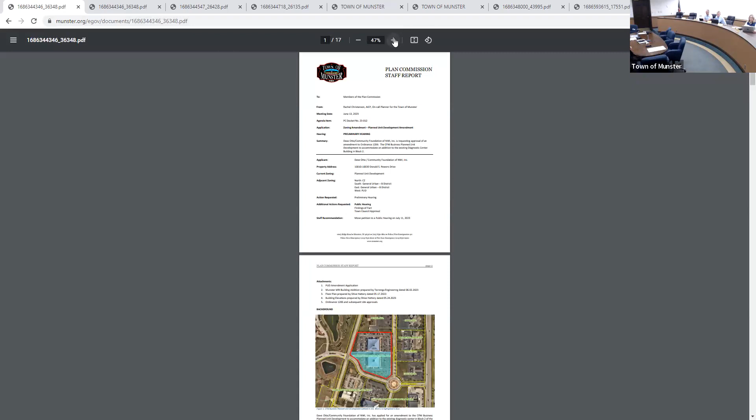Next up is preliminary hearings, PC 23-012. Mr. Otte from the Community Foundation of Northwest Indiana is requesting approval of an amendment to ordinance 1206, the CFNI Business Planned Unit Development, to accommodate an addition to the existing diagnostic center building in Block 2.

I am your on-call planner until you guys fill your planning director role, so I will be walking you through all of the staff reports tonight. Was everyone here at the last meeting that I was at? Because my first meeting was the May meeting, so this is my second rodeo with you guys for Plan Commission. It's great to be here.

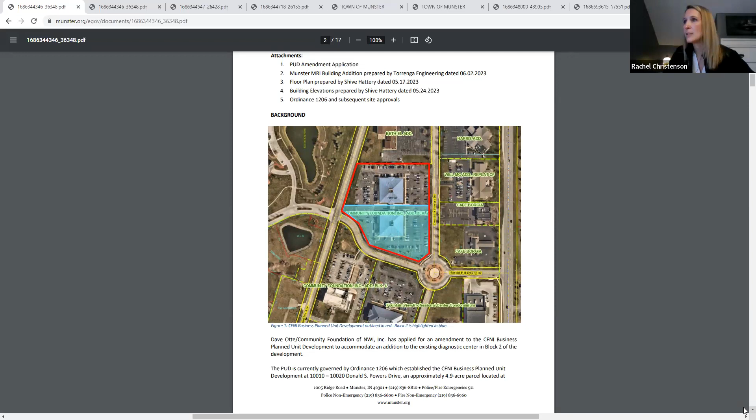But today what we're going to be looking at is the addition to the east side of that diagnostic center building. It's going to accommodate an expansion to the MRI suite and the CT scan suite for a total addition of approximately 2,000 square feet.

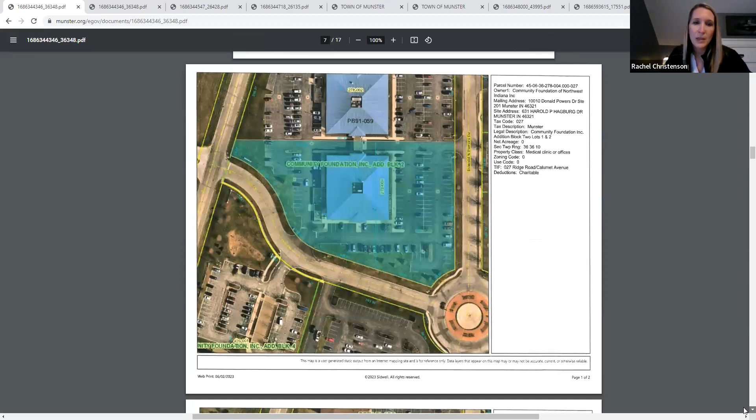Jill or Dustin, if you guys could scroll down to page 13 of the staff report, it will show a little cutout version of where the improvements are taking place. So this is a preliminary hearing for a 2,000 square foot addition.

Thank you. Is it between the two buildings? Is that how that's going to be set up? No, it's not. If we can get it centered a little bit, you can see on the building to the south—right there where the cursor is being hovered over—that 2,000 square foot addition will remove 11 parking spaces from the site.

There's going to be an addition of a chiller area that will be fenced in, and then, of course, that CT scan suite and the MRI suite will be included on the interior of that addition. This one, since it is an old PUD, it was kind of hard to go back and see exactly what was all approved with the original PUD.

The changes being asked are not very substantial. Some parking will be removed, but they're putting a sidewalk around the addition, and there's fencing proposed around the chiller. As we move forward, we'll ask the petitioner for more details on that fencing. There's also a discrepancy on the submitted plan—one area shows a 9-foot sidewalk, another shows a 6-foot or 5-foot sidewalk, so that will need to be clarified before public hearing.

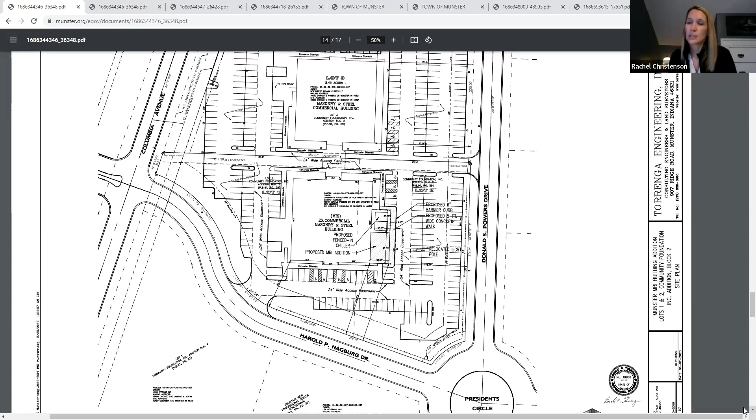Okay, great, thanks. Anything to add, Mr. Anderson? No, sir. Mr. Otte, you want to add something? No, sir. No, sir. It is what it is, right?

It's just a small 2,000 square foot addition on the southeast side of that building. It'll be structural steel, masonry, concrete floors.

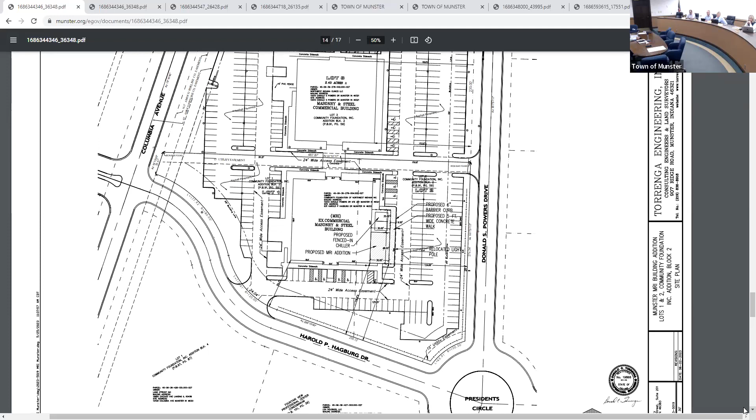Brian did a parking study, and it looks like we're averaging 71 spaces available at 10 o'clock, 2 o'clock, and 4 o'clock. So it looks like we have sufficient parking, and we've entered into an agreement with Fountain View before, in the past, if we have overflow, to capture 20 spaces from them.

I think we have exterior—pardon me, go ahead, finish. So if we do have struggles with parking lots, we can always re-enter into that agreement with them, because their parking lot's basically empty.

The exterior materials are going to match the current structure—light peak brick and basically a flat EPDM roof, and the glazing will be that tinted blue. Will it require any additional rooftop units? It'll be inside with the mechanical room, because if it ends up outside, obviously that raises screening concerns.

Thank you. Any other questions? Mr. Chairman, I'll make a motion to set this for public hearing. There's a motion, is there a second? I'll second the motion. Any discussion? Roll call: Mr. Anderson, yes. Mr. Zalinski, yes. Mr. Speck, yes. Dr. Kulturitis, yes. Mr. Rappin, yes. Ms. Mellon, yes. Mr. Baker, yes. See you next month.

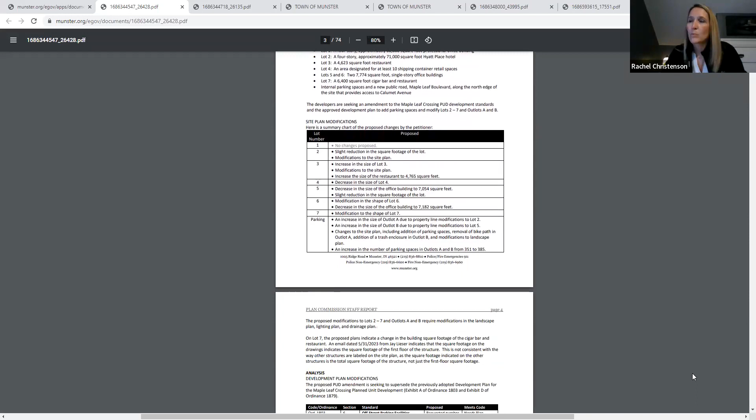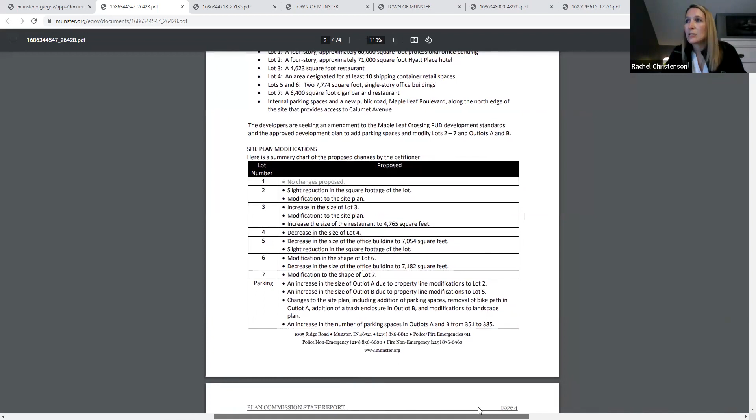Lot number 1 has no changes proposed. Lot 2 requests a slight reduction in square footage and modifications to the site plan. Lot 3 would see an increase in size, modifications to the site plan, and an increase in the restaurant size to 4,765 square feet. Lot 4 has a decrease in size, and lot 5's office building decreases in size along with a reduction in the lot's square footage. Lot 6 has a modification in shape and a decrease in the office building size, and lot 7 has a modification to its shape.

All of those modifications to the lot sizes mean an increase in the size of outlots A and B, both of the parking areas. In addition, there are changes to the overall site plan, including the addition of parking spaces and the removal of the bike path that cuts through the center of the site. There's also an addition of a trash enclosure on outlot B and modifications to the landscaping plan. Overall, the number of parking spaces being requested would increase from 351 to 385.

Picture. If we can pull up, let's keep going. So there's 2 pieces of this that we'll need to consider. Don't know where to go, so... what page is it on, Rachel?

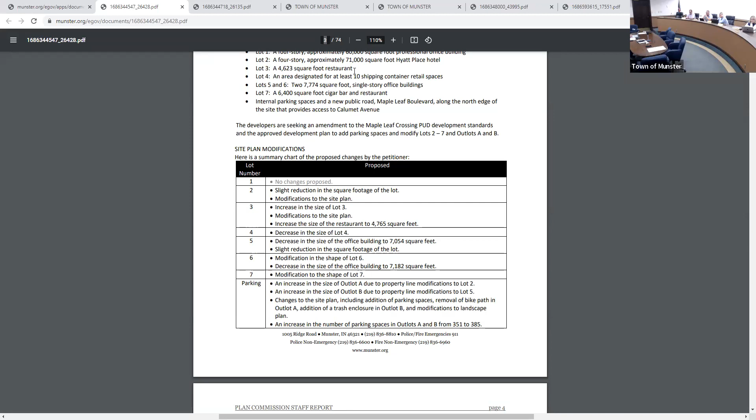Let's go to page 13, because this will give you guys an overall view of what the proposed changes are.

So the areas highlighted in red on this drawing are the changes being proposed. You can see a lot of the proposed changes are in the northwest quadrant of the site, or the northwest corner of the site.

That's up against the NIPSCO easement, correct? It is up against, well, I think the NIPSCO easement is around there. And then there are the railroad tracks. Yes, there may be two NIPSCO easements. This is the Pennsy Greenway.

So there are two parts to this that we'll need to consider. There's the modifications to the overall site development plan that we'll have to take a look at and approve, and decide what changes you guys think are appropriate to be made. And then we'll have to look at the actual standards, the text part of the ordinance, because there are a couple of discrepancies right now that I would hope we can get cleared up as a plan commission.

We're going to go through my analysis on the site plan modification, so that's where we'll start. You can stay on this page. First, we're going to talk about parking.

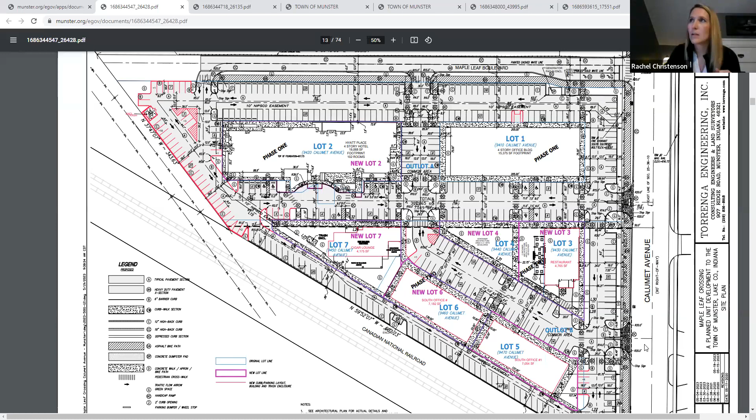The landscaping plan—Jill, if we can slide down a little bit more, the landscaping plan is included. Let's keep going. These are all the drainage calculations; it's likely going to be closer to the end of the document.

There is some landscaping that's being proposed to change as part of this plan, mostly focused on that northwest corner of the site. This is the lighting plan, and this is the proposed landscaping plan. Originally there was quite a bit more landscaping in that northwest corner, but with the removal of the bike trail, the landscaping seemed to have gone away with it.

We asked the petitioner to add some landscaping back in, but that was not changed or revised before this meeting tonight.

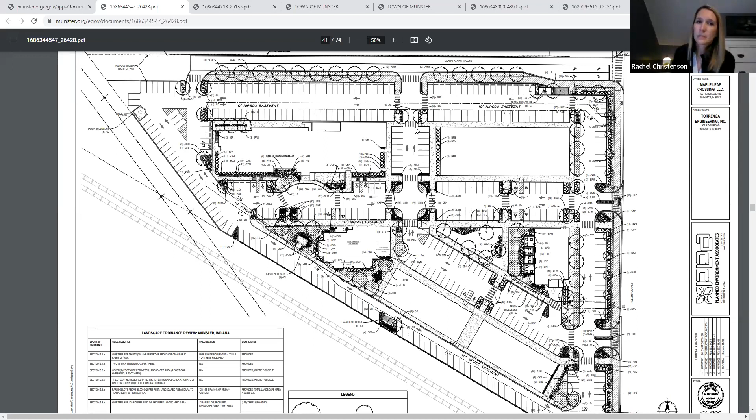Sorry to make you flip back, Jill, but if you could go to page 6 of the staff report and zoom into that, you can see what the currently approved landscape plan looks like.

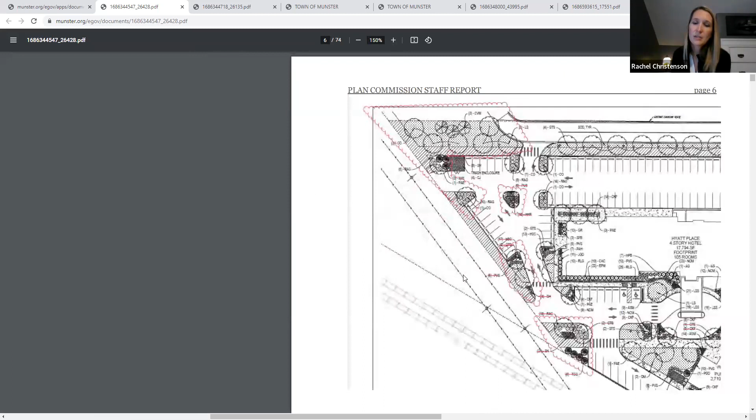You can see in red it's been highlighted to show the areas that have been removed with this petition that has been submitted. If you scroll down to page 7 of this document, you can almost see a side-by-side comparison of the amount of landscaping being removed with the proposed parking changes.

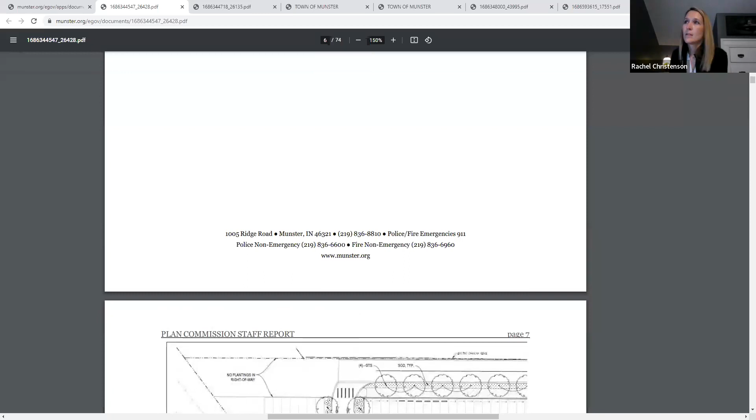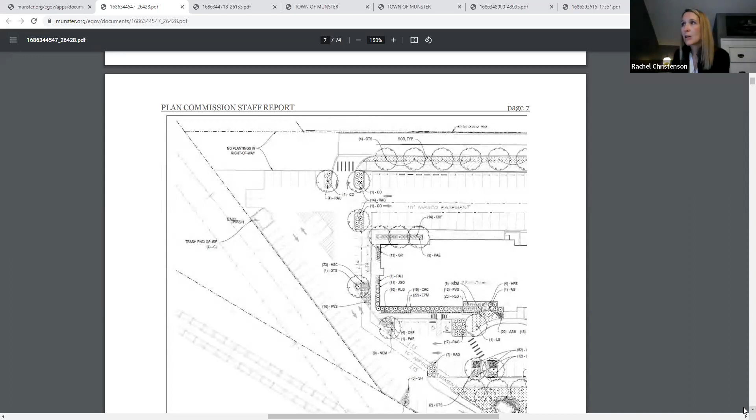For my staff recommendation on the PUD development plan and site plan, I'm aware that the petitioner's goal is to make better use of the site by removing the bicycle path and repurposing that area for additional parking spaces. In my opinion, there is still bicycle connectivity to the site with the proposed bike path on Maple Leaf Boulevard, or Maple Leaf Crossing, and the proposed bike path along Calumet Avenue. So with that being removed, it makes sense that we would be modifying the site to accommodate the removal of that bike path. However, I am concerned with the increase in hardscape and the decrease in landscape areas of the petitioner's proposed plan.

Should I be going through a staff recommendation right now, or do you guys want to hear from the petitioner first? The petitioner, because I want to hear about more spaces, but not just yet.

So thank you. Any questions for Miss Rachel as it relates to her presentation of the recommendations from staff?

Either or none. Is there, inasmuch as this is a public hearing, somebody to speak on behalf of the petitioner on this particular subject? If there is, please come to the microphone, state your name and address for the record, and you can maybe just stay on that page you were on.

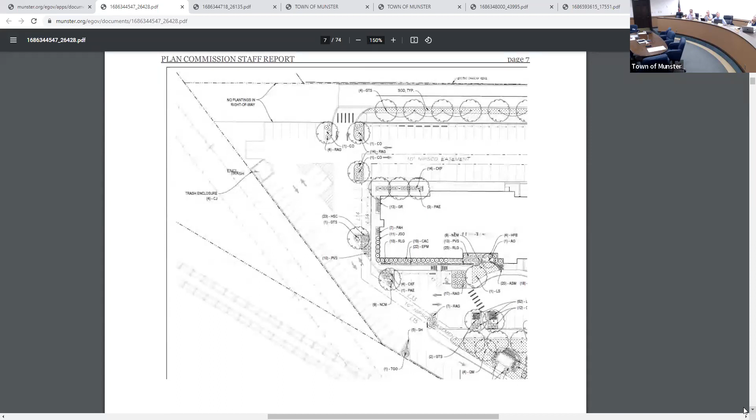David Beach, 1630 Cherry Blossom Drive. When we were here last month, we had proposed, well, let me back up.

We recall when we first started on this project, Jay bought the parcel of land, and there was approximately an acre at the back that was still owned by the town of Munster. The town traded that in exchange for Jay designing and building and dedicating the land for the road. So Maple Leaf Boulevard, along with the bike path, comes along the north boundary of the property, and near the back or western edge, but not all the way back, they turn and connect with the right of way, which will go through to Fisher Street.

And when that trade was done, there was still a little piece in the very far northwest corner, west of the right of way, where the bike path and the road connecting to Fisher would go. So what we had proposed was that little northwest corner could have accommodated some additional parking. You recall when we were here last month, it was pointed out that the land swap for Maple Leaf Boulevard for this back acre—the metes and bounds took that right of way all the way through to the west corner of the property. And Lansing Country Club had, I guess, presented something where they might connect through this wetlands, which I think is currently owned by Pepsi.

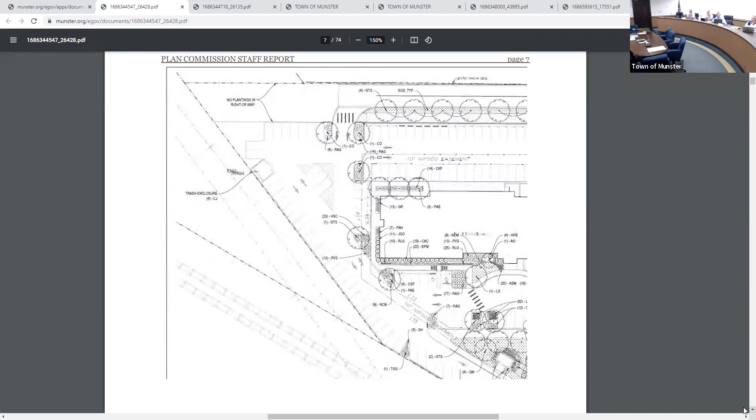So what we did is we just removed everything from that northwest corner. The town owns it, we don't own it. I don't know if there are some other uses someone else might want to make of it, but we took everything out of there. It's not ours to develop at this point, and we're fine with that. The town still owns it. This back corner where it says no plantings in right-of-way—my understanding is that little corner is now owned by the town, not by us. So that wasn't part of the swap for the land for Maple Leaf Boulevard. It was. How does the town still own it? This piece of land that runs the entire length of the property was traded from Maple Leaf Crossing back to the town, and we had thought it ended where the road ended. We were just trading for the road, but the legal description runs the entire length of the property. So it's not ours to develop. We simply removed it.

As we said last month, we need to get our curbs and gutters going, so we took it out. Obviously that decreases the landscaping, but for edification, right to the north you have the Pepsi manufacturing, which is kind of a corrugated steel building. And to the west, you have the two large NIPSCO transmission lines that connect with a substation just northwest of this. That's where that little corner is located, the very far back of the property.

Did you give that land back to us? We did. When did you do that? When we traded the Maple Leaf Boulevard for this back acre several years ago.

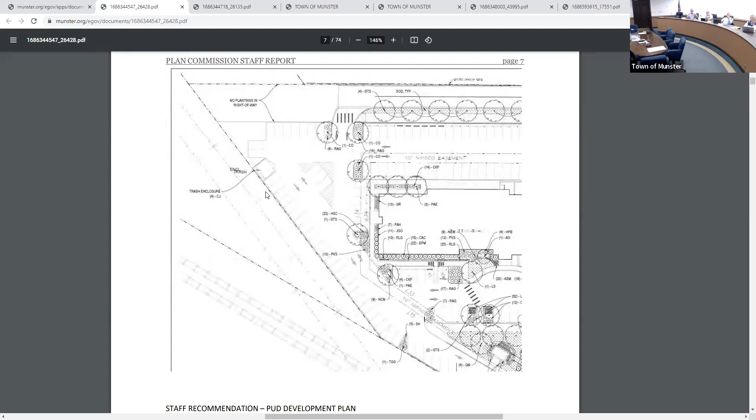Councilwoman: well, so it says - okay, so I get this, what is ours and what is not straight. One of the motion with conditions that staff is recommending says a commitment to plant future parkway trees per master zoning ordinance after construction of Maple Leaf in the right of way, labeled 'no plantings in right of way.' So is that - can you circle that with your finger right there?

No plantings, touch - well, don't, or just - it says 'no plantings in right of way' right there. So is that ours or not? It is, it's public right of way. So we want them to put trees in there.

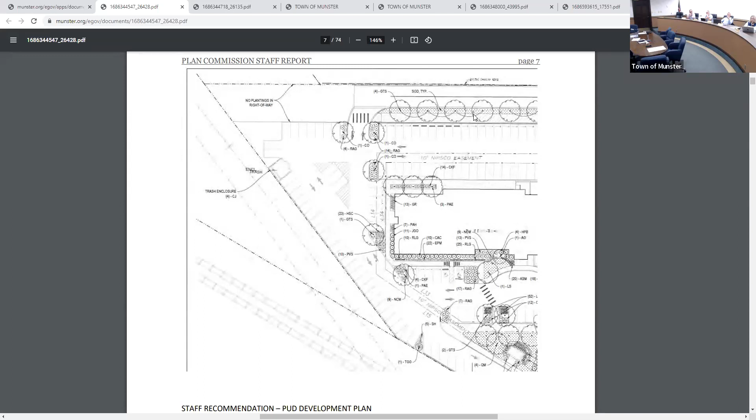Just like they're doing here? Yes, okay. I just wanted parkway trees, just like everybody puts in. Right, I know, that's what I'm asking. But that's not part of what was originally there - originally that was what?

That was part of the - it's traded back now, to the top now. Now we're saying that because they're going to extend the parking, then therefore they're using that, so it has to be treated like a right-of-way parkway, like a house, or a business or anything. Is that what - I'm just, there's just so many - we're talking about 4 trees.

Jay Leeser, developer for Maple Leaf Crossing: The reason we expanded the parking was because the road stopped and it was turning. Then Jill sent me a rendering of what Gary Warfel might do, which would bring a road right through and curve in, but he has to clip, he has to get 10 feet from Pepsi. So if I don't improve it with asphalt or sewer or with trees, it's going to be converted to a road. So we're kind of in a catch-22 on what I should do.

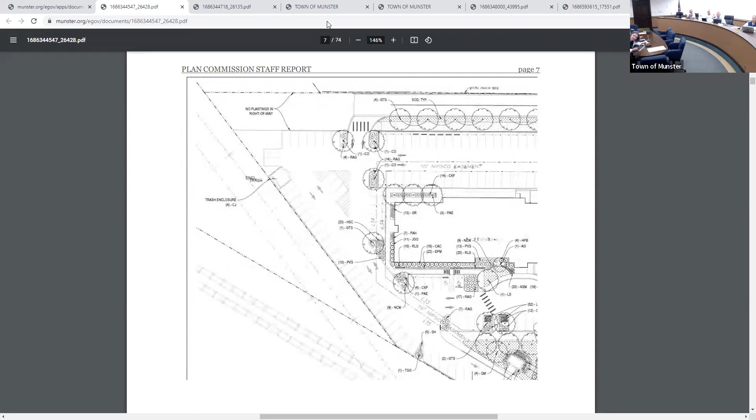So we just said we'll stop, and this is the town because you want to take a road all the way north. So go back to that other one that you were at that showed the trees and where the road was - I'm assuming estimated to be laid out. Because while you're looking for that - yeah, like that. So I'd rather spend money on parking and tear me up than trees.

Because that's the right of way, they're gonna take all this for Gary Warfel's - we didn't ask to put those trees back. We're asking that when the road gets developed, that they plant parkway trees. Oh, way down the road, you're not talking about - okay, it's a contingency. The road being developed, the 100-foot right of way is here. So there would be no trees.

There's a 100-foot right of way the town has on the Pepsi chain link fence. So wouldn't it be 4 trees there, Jay? Just like they would match the same line as you go straight down? No, but I'm not putting a bike path to nowhere - it goes into the wetlands, it goes into utility. It would just be 4 trees.

Yeah, we found it when we did the improvements. It was in 3D when we saw that - wait a minute, this is cattails. I only mitigated up to here, all the way through, right, to do this.

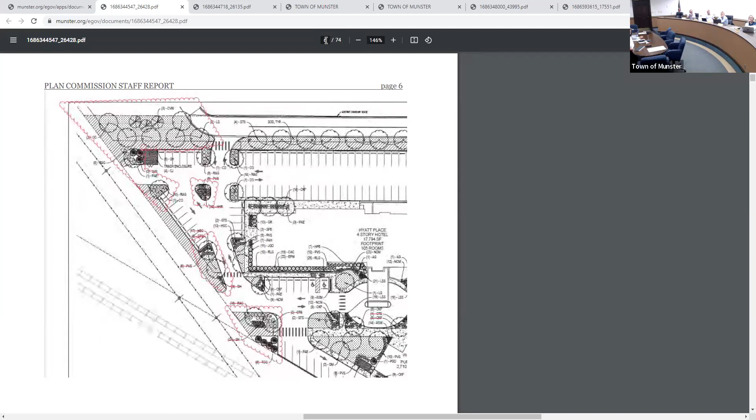When they said don't do parking, and you sent me Gary's plan, which is totally proposed, he has to clip 10 feet of Pepsi to make his truck turns. So until you do that, I'll just leave it alone. The right of way was to here. If you don't want to give me the right of way to improve it how I want to do it, then I'll just leave it alone.

I'm trying to make more parking for the overflow. I think you're saying when the road gets finished off, it's coming all the way through here, Roland. It's 100 feet right of way. So it goes all the way up to your curb line right there? Yeah, it's all this. Gary's drawing, you have it?

I don't have it. It takes 100-foot right of way, and he actually has to clip 10 feet of Pepsi, which he's not gonna do. That's probably not gonna be able to handle any semi-traffic on that, if he gets an estimated 10 right foot there, if he gets a 10-foot cut from Pepsi.

It's been designed to handle truck traffic. So stay on task with regards to what we're talking about here and the changes on the parcel which Mr. Leeser owns. He does not own that, and you're not requesting as a part of what he's trying to accomplish anything to happen to the land currently owned by the town. I think it's part of the condition, that's why it's in the motion.

And if that road were to be constructed, there will be space for parkway trees, and when and if that road is constructed, we ask that the trees be planted at that time. I agree to put trees in when and if, but it's conditioned now. Part of the language. I think that's what threw me, because it seems like, I'll be happy.

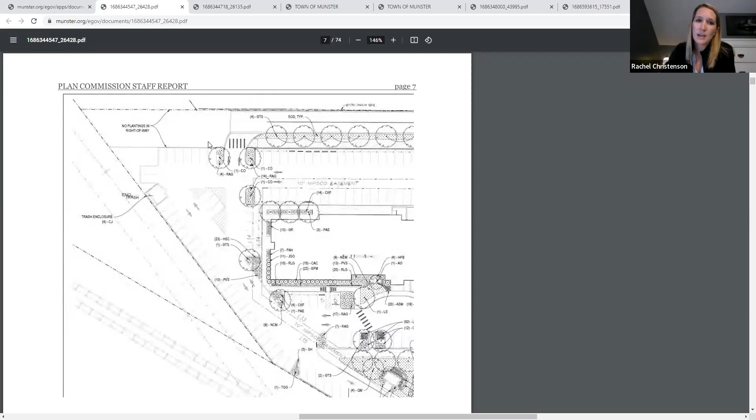So I have a question, and I don't know if this is for the petitioner or for staff, as it relates to them looking for additional parking spaces, and what was submitted. The feedback from staff, it looks like, yes we hear you, but with what you're doing, put more landscaping in and take some of those spaces out. Is that how I'm interpreting this? Yes, from my perspective there's not been any new information presented saying that additional parking spaces are required with the approved uses of the site. We had 2 parking studies that had been done previously that gave numbers on parking spaces needed for those uses. So I am struggling with the addition of parking spaces without having additional data to support it.

Now help me, this might be you, Mr. Anderson, with regards to a PUD, but it is my understanding of a PUD, even though we try to align with the zoning requirements and development requirements, a PUD stands by itself. It's true. Okay, thank you. So that's why it's before you as a subdivision, because this is a PUD, you have the right to amend this as you see fit.

So as a way to provide resources, staff has to have some kind of framework. We look at the data. We say, this is what the data that was previously provided states, these are the guidelines that other people in town comply with. We put the two together, and that's a recommendation. But it's only a recommendation based on a framework that we have to provide you information. Thank you.

I'm sorry, Mr. Beach, continue, or is there more? Sure. So our thought on this, we proposed to increase the parking to 385 spots. And we're proposing to do that by adding spaces at the very back of the property up against the NIPSCO easement and transmission lines.

And our thought was, you recall back in the original parking study, according to the Munster parking code, we would have needed 509 spots for each of these buildings individually. And because we positioned them with a hotel next to an office building, we were able to reduce that significantly. The hotel will need it at night, the office building will need it during the day, the restaurant will be more night, and then the 2 south buildings will be day.

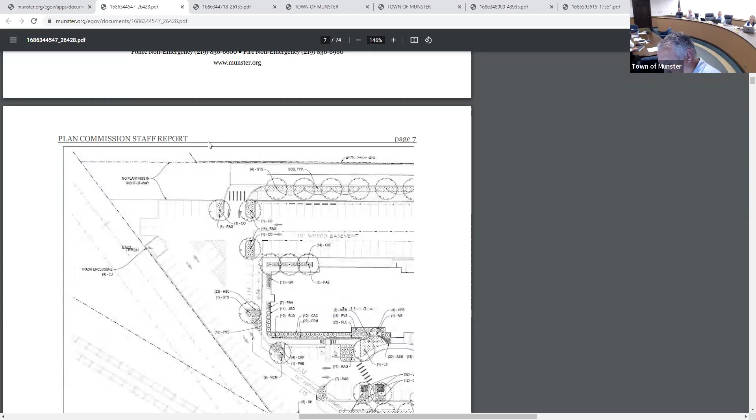So who owns this property down here? Is that an easement? That's Pepsi, and then there's the big NIPSCO easement that comes through here - it's wetlands with transmission lines. Pepsi owns property all the way down here towards 45th Street. This triangle that goes all the way back up to the NIPSCO substation is Pepsi property. I would have thought we could have added some trees down there, but that's all wetland - to do anything in there it has to be mitigated. It's all wetland all the way up to their property line.

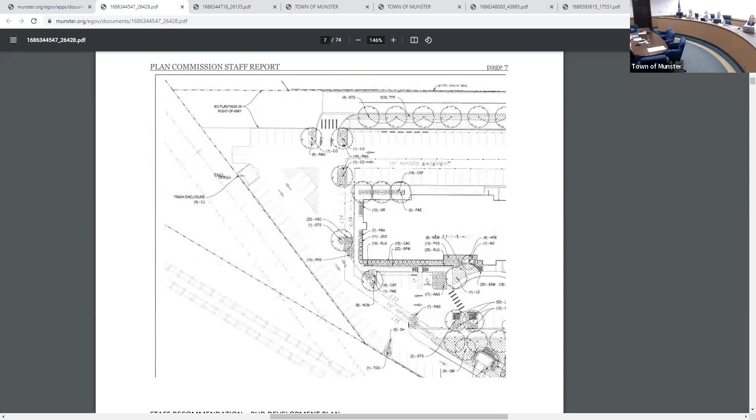Okay, so can I see the difference between the landscaping you're proposing and the landscaping the town is proposing? For the most part - well, this was the difference. This was the approved landscape plan for the PUD. What page is that, Sean? Six. And so I bubbled everything that's bubbled is gone in the new plan.

Okay, so there was parking, but I thought there was no parking here before. But there was - it's part of the bike path. Yeah, this bike path right here, which when we cleared the wetlands in January, we realized it went to the wire, the NIPSCO lines.

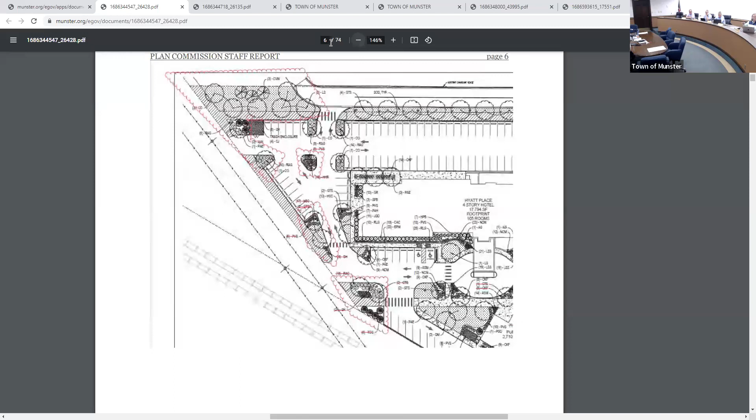Gotcha, so I'm sorry - I would say, even though it's in the back, the parking, instead of having just parking and no landscaping, how many trees... when I look at this motion it says take out 3 spaces so that you can have, like, I do think the island - I'm trying to find it as I'm talking - the island. I mean it just adds some, because even if it's in the back, if you're at the hotel and you're coming out, going to the cigar bar, I don't know, just so that it's not all concrete. Yeah, so I do agree. I hear a lot of issues with us trying to reduce parking, but everything I hear from businesses and people going to them is that they want parking.

Let me see if I should circulate it - I thought I sent it to Jill and I didn't. He talks about what we removed and what we did. Don Rubel did work for Don and myself and other projects, and he did the design. It talks about how we don't lose much by doing that.

But could we put something there, so that whole area isn't just flat? I'm trying to figure out - so there's no landscaping back there? Maybe if we can enlarge this just a little bit. But one of our concerns is if we put in a built-up curb right here, the cars are going to be coming this way and then having to do like a 120-degree turn to come back. This was the smaller one.

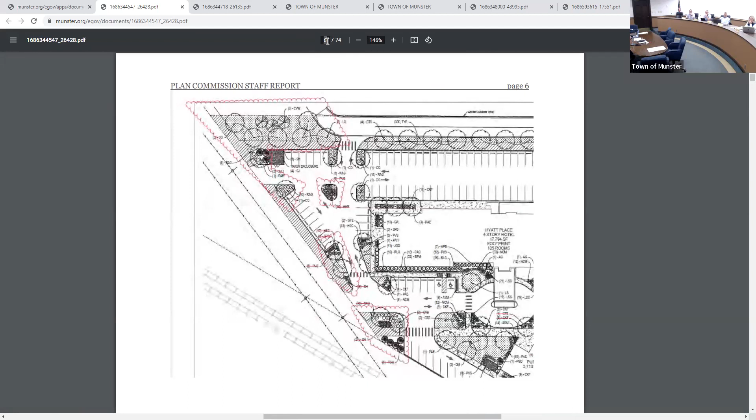When we push this back, now there's... if you can go back to the other one, with the larger area there, you have to turn back more than 90 degrees, and then the same this way. It's more than a 90-degree turn.

So, I'm not a parking lot designer, but would it be crazy to make that... because I see what you're saying, and I've seen that issue in other places where people try to turn and it's too tight. But if those 3 spaces were just gone and you had like a circular shape, you know what I mean? If it was round, it'd be easier to get around, and you'd have some greenery. I don't know if that's silly, and I know there are construction experts here. I just don't know how important those extra 3 spaces are. I'm just looking for feedback, tell me if that sounds silly.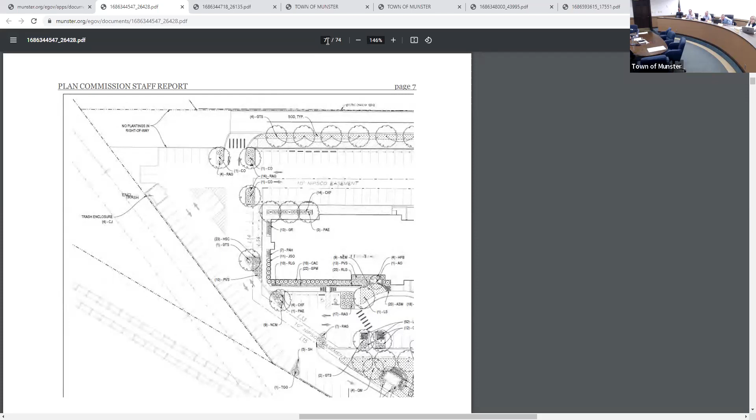But Jill, could you go down to page 9 of the staff report? Because I think some of the things we're trying to talk about here are indicated on page 9, possibly. So with that triangle piece, one of the staff recommendations is to change that piece you were talking about to a landscape island, similar to what the original plan was proposing. And then these bubbled-out areas too, staff is recommending that get converted back to landscaping. Those are the areas that staff is looking for things to happen with.

Right, but I'm just saying, instead of having any parking there at all, it's just like a surface to get up. Correct, so they upgraded it, made it bigger, and tried to take that triangle and do that. That's the new addition, and my other addition is up here, and that's where the other one is. Here's the property line, and we're trying to push it down. They're proposing to keep that, and staff wants the landscape.

Now, what were you going to do? What was the original proposal around those parking spaces? Let's take the triangle. So, was that grass, which is going to die because you're going to put a bunch of salt and snow on it every year? Is it going to be mulch? Is it rock? Staff is saying they want trees and hibiscus.

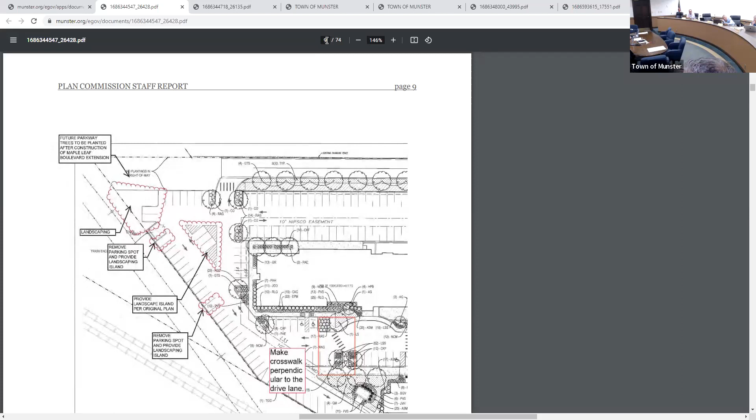Can you have any little greenery right here, small stuff like in this area around? Is that all striped? Okay, so this is striped, you're not curbing this around like this, you're just putting a curb around this now. Yeah, this was just striped on the paper.

The only problem with having the 2 islands here, if you're dealing with snow, this is a nightmare to try to plow that kind of stuff. That's the one thing, and some drainage too. This is tough back here, and you're going to have a hard time plowing around all this stuff back here anyways. This needs to be done.

These trees need to be done in the future, whenever, to maximize our parking with the box we have. I appreciate what staff's trying to accomplish with trying to green up the place, especially in that back end, but on the other side of that property line, if I'm not mistaken, it's gonna be a smorgasbord of greenery.

So maybe a compromise is to do something in that northwest corner to the councilman's point. That's where the bike trail is, and that's kind of where some of the traffic's gonna go into. Lansing Country Club will end up making their way down there just to make it look nice. My suggestion would be some kind of evergreen type thing that stays green, but I can't speak to how everybody else feels about that, just because it stays green year round. Big fan, and I'm all for it.

I think a couple things to consider as you're looking at this too. It's not just about the landscaping, it's about site circulation in general. So the triangular piece we're debating, the 3 parking spaces and whether or not we put greenery in there or not - if we look back at our zoning ordinance, one of the guidelines is that rows of parking fronting on drive aisles, including alleys, shall be provided with a minimum 5 feet of landscaped buffer. That's not just about the landscaping, it's about site circulation in general, keeping people in an area where they know which way they should be driving. I think that's important to consider with this too.

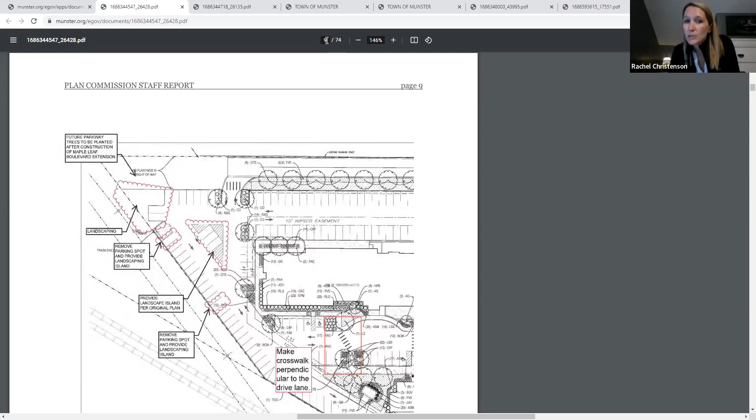And I think the last thing to look at too is that the landscaping in the northwest corner, the way it's being presented now, it does not appear to be cohesive with the rest of the site plan. The rest of the site plan is landscaped and it's very lovely, and this area just seems very minimal compared to the rest of the site. It just seems very disconnected. So I think if we can put a little more emphasis, like we've done with the rest of the site, it would just help with that.

If that was designated, that northwest corner, as a place where you put the big pile of snow, what kind of plant materials do you think would be able to survive after that scenario? Because that's right now where I'm putting all the snow. No, the dumpster is a little further south. Dumpster is right down there, right there.

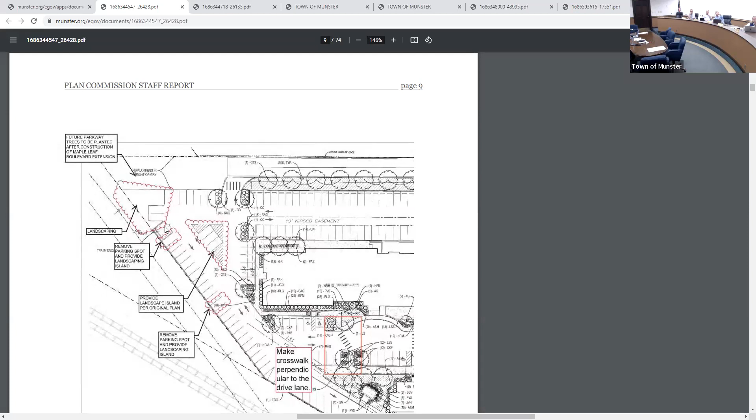Well, there's 2 parking spaces between the dumpster and where the dumpster used to be. See those 2 slots? Those are 2 parking spots you're gonna end up losing when the pile goes up. That's where the pile would be.

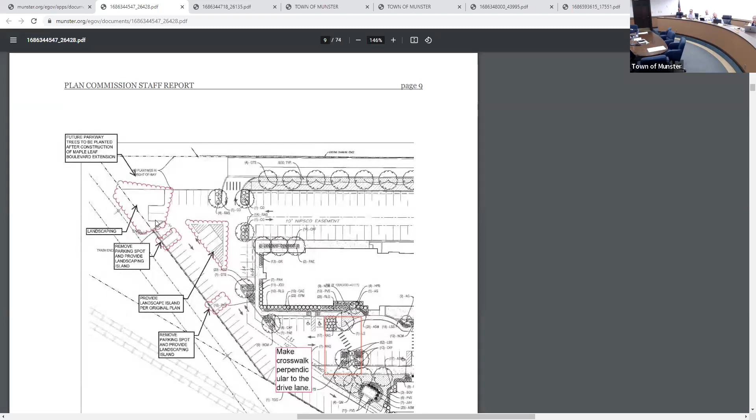If I can make a comment, for someone that's been on the site daily, like Rachel - have you been on the site? Yes, I have. On the back of it? Yeah, so it's all cattails and depressed from 2 rail lines. It's raised and there's 2 valleys, so it's low, ditches. Not Phragmites, is it, Mr. Anderson?

Better not be. So we're just trying, like I said earlier, to maximize the parking. We could put trees on the back if they wanted in that triangle, but really we're just trying to get extra staff parking for the high end, staff parking for the common staff, and again it's the western end of the property. I get it. We've done a nice job to date with the architecture and the buildings. We have 2 more buildings to show you next month along the south boundary, and we're moving forward. So we're talking probably about 8 parking spots we're missing out on.

Okay, let's see - curb and gutter and landscaping. Jay, the only problem I have with not having that 3-spot triangle curb is every time something is just striped, people park however they want, and there's no delineation. My wife will park on an angle and take up 3 spots and we block it. So I was gonna curb it, and Don and Ed and I spoke - when you back up against the building, you'll whack that, maybe, if you don't have that extra foot. So we can curb it and triangle it. I'm just trying to make it so when they plow, it's just smooth right through.

Even in Schererville, the new YMCA where the Omni used to be, they had to put up all cones, because guess what - people go over that line, whatever they want. I don't know what the happy medium is. If we triangle it with a curb and put a tree in it, it screws up plowing. Well, you're not putting a tree or anything in it. No, but if we leave it out, it's a total void, and I'll probably park there anyway. So I don't know the solution, other than we engineered it accordingly, and that was the best.

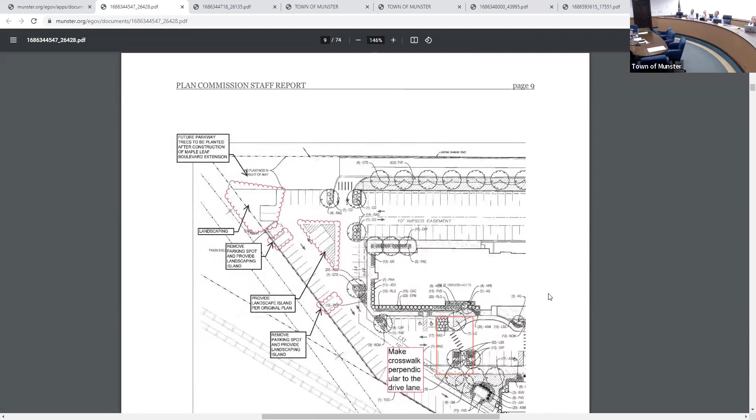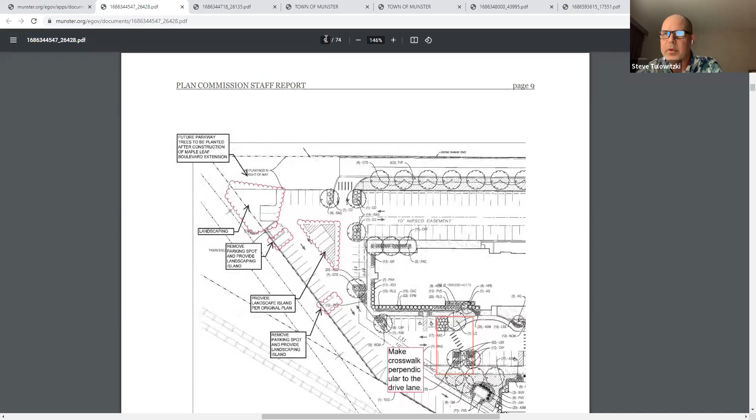Councilman? Yeah, Mr. Chairman, since we're talking about the triangle with the 3 spots, I'm curious what was the issue with the original design for that. It looked like there was some sort of structure in there to help with the traffic flow, and I'm wondering if it can be reverted back to the original design, or what the issue would be with that.

Yeah, and it's sounding like those spaces are problematic now, so I'm wondering why we can't revert to the original design. So the curbing, Jill, as it relates to that storm catch basin, are they humps or bumps, or is it an actual curbing?

I think it would be a normal 6-inch curb and gutter section, to bring the water to the catch basin. There are cuts, so the pavement curb is sloped to that island, and the water would go in through the curb cuts to get into the basin.

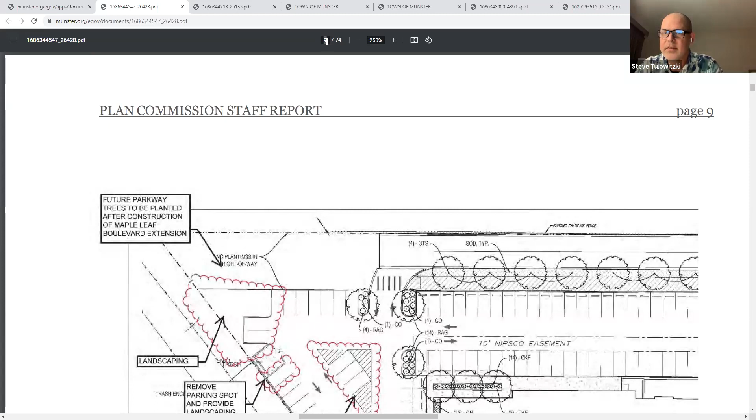I don't think the curb helps drainage. You had a curb around this island anyway. Right, but I don't think it helps drainage. I think if you don't want to go against me, I'll just leave it open, those 3 spots.

Because you come in and out of Maple Leaf Boulevard right there. Right, like I stated, we're trying to maximize parking. If it's an issue, I'd rather not put a curb, just leave the storm catch basin there and let it go how it goes.

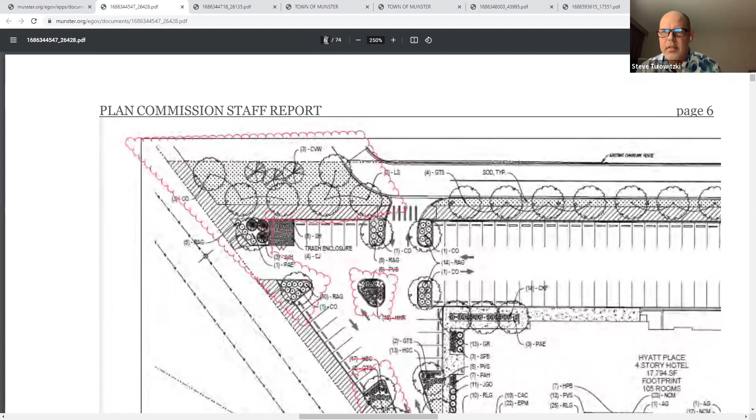Is the curb... I'm also wondering what's changed, because originally the parking requirement was 509, and the adjustments were to reduce the amount of parking. Now it seems like there's a strong desire to maximize parking, to the tune of 3 or 8 additional slots. So what's changed about the thinking, the actual design, or the uses that's making this so critical at this time?

I think it's the demand of where we are in the middle of town, trying to meet the demand. And I would also say, Councilman, the answer to your question was density, and your proximity to this development isn't easy to park at other locations.

Correct, we don't have a parking garage across the street, or public roads nearby. So we're just trying to maximize what we can. And again, if we build it and there's an issue, I would go back in and re-engineer it if we found something in the field, like we do over the years.

Mr. Chairman. Yes, sir, Councilman.

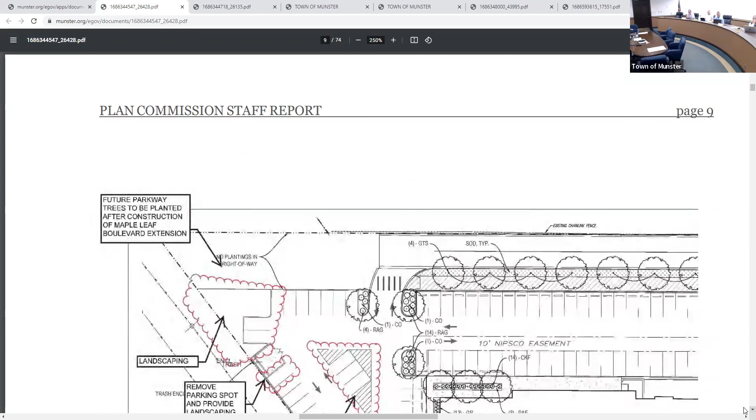I agree that we need to landscape that one corner. I think that little island area we're all talking about should just be left wide open with the drain there and not landscaped at all. Landscape that upper corner, get rid of those two little islands, get rid of that triangle in the middle, and just leave that wide open so it allows for plowing. I'm sure people will know how to park since there's no issue with parking in that triangle. That makes the most sense to me right now, but that corner definitely needs to be landscaped somehow. That's just my opinion. Thank you.

Anybody else? All right, we got some action here. Let's do something. I mean, as a developer, I would. Hold on a second, Mr. Lieser.

So what we heard is about the corner up here as it relates to some landscaping. We've got the triangle piece, and whether or not we want to consider staff's recommendation to lose another two spaces for additional landscaping along the property line. And it looks like there's something with the crosswalk. On this sheet that's currently up, the crosswalk looks like it's at an angle just because of the design of the layout, but squaring it off gives a shorter distance for pedestrians to walk. I know it's not by much. It's all about walking though. We like that. Good.

We did talk earlier with Jay, and he indicated that was an accommodation he'd be willing to make. We just want to make sure we get it in. I think it may be that we'd scoot that landscaping down to the west a little bit so that crosswalk is perpendicular. It might change, but I don't think you'd lose any parking spaces. It's just going to move where that little landscaped island is.

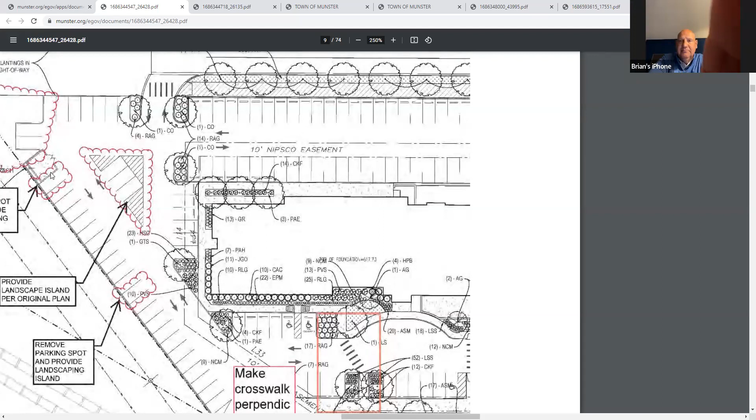Thank you. So we have a motion, is there a second? Going once — hold on, I just want to make sure I was following along. So is the three parking spaces staying or going? Is it going back to the original, or staying the way it is with the three spots right there?

In the motion, it would go back to the original. Okay, and then the other one is the two jut-out spots I see — it's going just back to parking, with no islands in those two locations.

Right. What was that again? And then there's three removals, removing those — are they staying? He's going back to the first one.

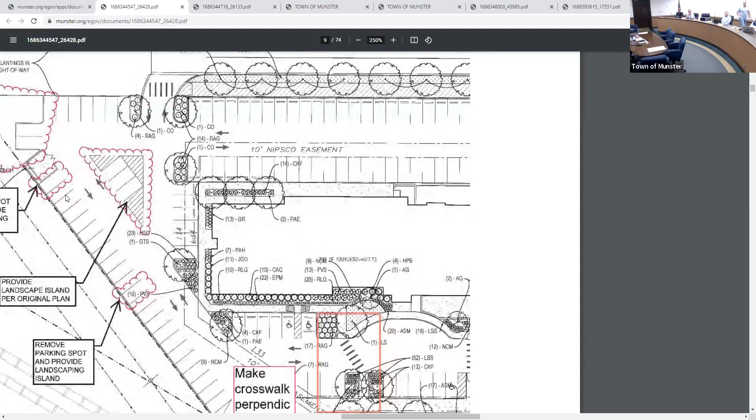So you've got to go back to — I just want to make sure, 'cause I'm confused. Yeah, so it's basically the full proposal I showed: this one's coming out, this one's coming out too, right? Coming out. This is staying, being landscaped, and then this is going back to that little island.

Is that the motion — only about the parking spaces? He did not change anything about all the other things. So all the other issues that were listed by Rachel are also still included in that particular motion.

Yes, but the only thing he adjusted is — this is coming out, this is parking, this is parking, this is an island, right? That's it — is that what I'm clear on?

I'm trying to get the corner clear — are we? The corner was staying like this, just being landscaped. These spots are staying here, just fully landscaped. Yeah, this is out, this is out, this is parking, this is parking, these stay. I would propose removing that whole thing so there's no confusion.

Stay on whatever page it says and agree on this page, yes, and then go to the other. Okay, so we understand about the parking.

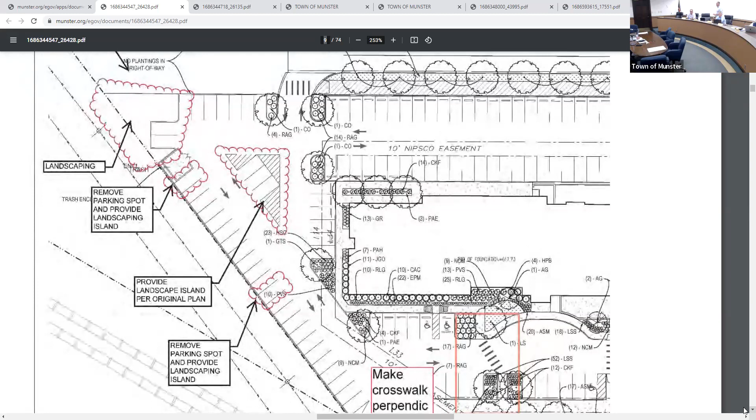It would be landscape, and the other page has the plans I don't have visual for me on the modifications for lot 7 and the off-street parking. I don't understand those. Dustin, can you put up one page on one screen and one on the other, or are they all together? No, they're tied together.

Rachel, do you know what page it was? It was back at the beginning. Was it maybe page 4? I didn't hear the question clearly on what we were looking for.

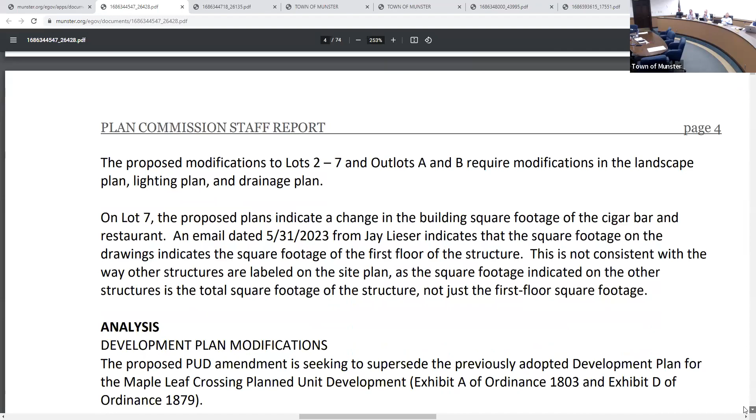This shows the square footage discrepancy, is that it? Yeah, the lots and everything. Okay, if we could scroll down to page 13. And then if you can pan over to lot 7.

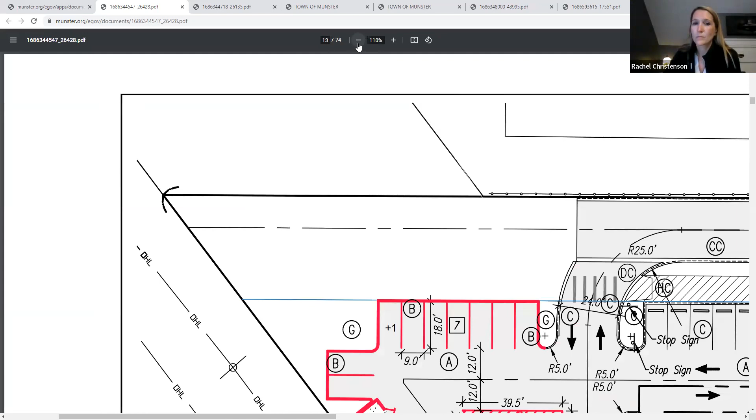So lot 7 here is labeled as the cigar lounge at 4,175 square feet, which is not the total square footage of the structure. That is the first floor square footage only. The rest of the structures on the site are all labeled with total square footage.

So when I was reviewing the plan, we had asked the question. That's not true, because lot 2 is more than 18,000 square feet, that's the footprint. Same with lot 1, it's the footprint, it's the first floor, right? Yeah, it's a footprint. So lot 7, that box is the box that was approved in November.

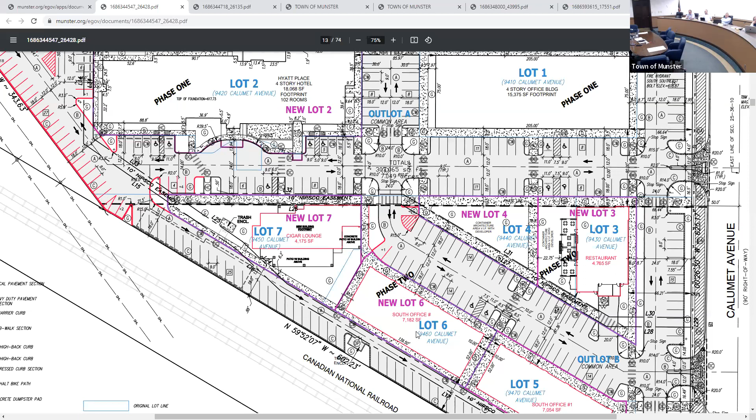I don't disagree with you. I think the shape of the blue line where the letter G is on lot 7 was the original building of lot 6. And I felt it was too close to their patio, so I shrunk each building by about 400 feet so they would space out more and have more landscaping. So that's what lot 7 represents, but the footprint is the footprint.

Why do we have the footprint indicated in red, and the chart below says new curb, parking layout, building and trash enclosure? When I'm reading this, there's an indication that structure is changing in some way. Explain what you're talking about and reference which lot and where it is.

Okay, so where you have lot 7, the footprint of the building is outlined in red, and according to your key code, it says that's new, indicating a change. So the only change I could find was the square footage being indicated, because on an earlier drawing it said 6,400 square feet.

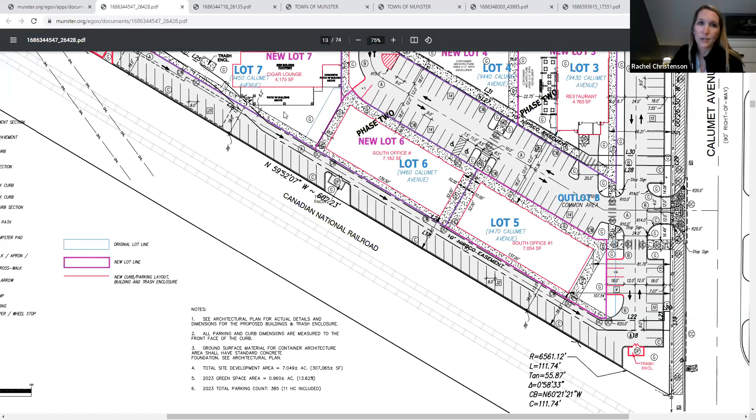And I have to go back to what we did in November, but the patios are probably not in the red box. So if the patio changed, I would expect the red line to be around the patio. The patio is what was approved in November, and me moving the lot line was to kind of space it.

So if there's a language barrier, we could fix that. Okay, but the box is the box, if I recall.

So I guess when I was looking at lot 3, I believe the square footage of the restaurant is changing on lot 3. So I was comparing apples to apples on the plan that lot 3's square footage that you had submitted was changing for that. So I assumed then with the numbers changing on lot 7, that was also indicating a change.

Everything in red on that page is changing. The council members, way back when we originally did this, there was a small pub on lot 7. When you approved Karma, it was a change from the original pub that was going to be in ordinance 1803. And what you have on here now, Karma, is what you approved in November.

But it's updating the site plan to reflect what you had in November, which is different than what was back in 2000. And all I did was make the lot where G is about 10 feet bigger to get it away from lot 6, so it wasn't on top of each other. The building never changed from our November approval.

So could we just change the cigar lounge writing and the line around it to be black so that it's not showing as a change? All the red line needs to change, right? Right, Joe, you're correct. All I did was change the lot, not the building. So between lot 6 and lot 7, I changed the lot.

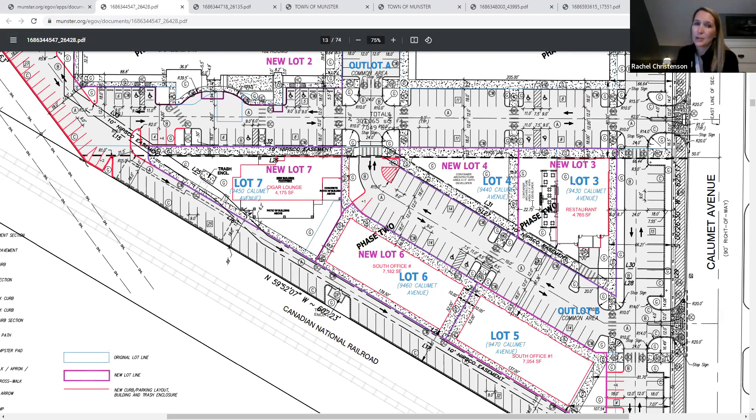It was difficult coming in as an outsider reviewing the standard language and then looking at the approved site plan. These were things that I caught that were not matching up, and I wasn't sure as staff which one is the accurate one or the overriding one. I think you typically go with the more restrictive one, but I don't think that was the route we wanted to go with here.

The only thing I would say, if you go to the northwest corner, Dustin, if in 10 years Maple Leaf Boulevard does not go northwest to Lansing Country Club, and the town says why don't you add 12 parking spots because it's dead property, then why would I be restricted from adding 10 parking spots if I was going to pay for it, so there was more staff parking for the Hyatt? Then you'd simply submit a new amendment like we're doing today, correct? I get it, but why do you do not-to-exceed and put me to the exact limit you're showing, and not what it could be?

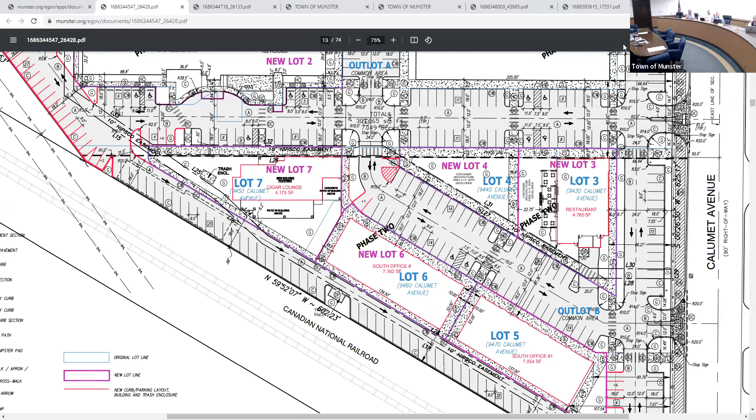Well, the point I just heard, and as a former mechanical engineer, I know it's bad when blueprints aren't accurate. Say not to exceed 390. I mean, why do you put me to the limit that it is? Because there is an opportunity where Maple Leaf Boulevard may not ever go through on the 100-foot right of way to the northwest. Alternatively, we can say that the parking will be reflected in the approved site plan, and we can take the number out altogether in the standard language.

I'd be more comfortable with that. Everybody would be. That would have been great to have in there. Agreed. So let the motion reflect that latest change to be approved in the site plan.

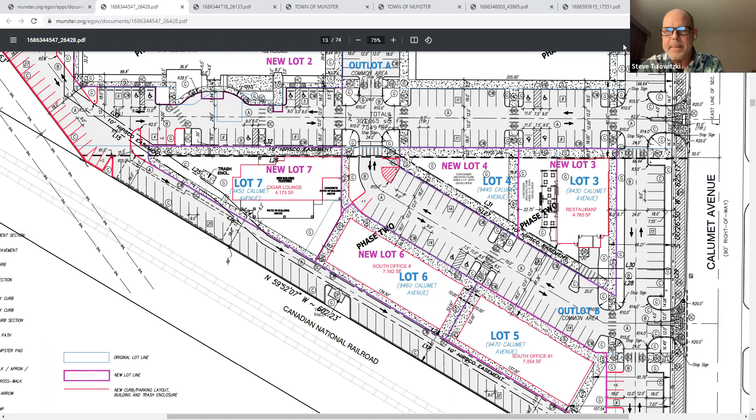Okay, my next question is, Mr. Anderson, I'm buying a vowel on what we're doing. I'm looking for a second. I want to know what the motion is first. What is the motion, is to leave...

Executive Secretary: The motion was, as previously stated, except to leave the two westernmost spots on the western border that abuts the Pepsi property line as parking, and then to drop the language on new lot 7, and amend the language regarding the parking number not to exceed, striking that, and let it reflect in the site plan as presented.

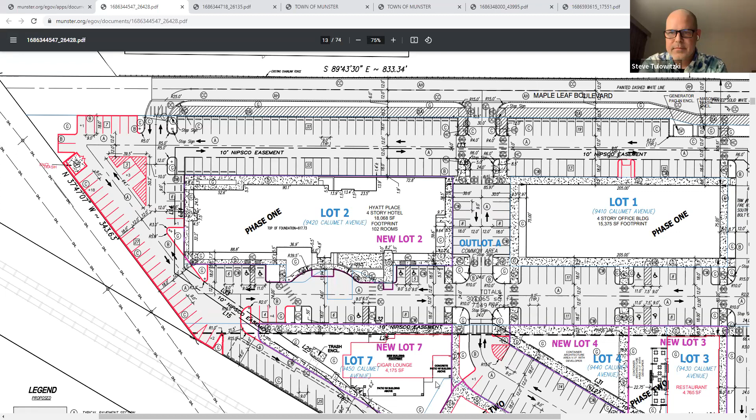Councilman, is that what you said? Yes. There's the motion. Is there a second? I'll second. Thank you.

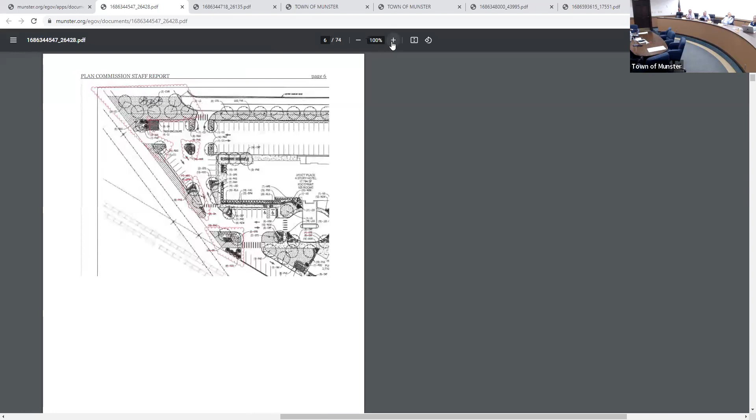You don't want that island there. I'll have a catch basin, then we'll take that away. Catch basin right there, that's my suggestion. That's just gonna be part of the discussion, be an issue.

I would agree with that, Councilman, on that island. It's gonna be nothing but a hassle. That thing will never keep landscaping with plow trucks going through it. It'll be a disaster, that would be my own concern.

But I thought there was no island, I thought we had a whole conversation that there's nothing there but curbs to feed into a catch basin. Now you're saying no curb? Let's regress, Mr. Tulowitzki, back to the layout. My understanding was that was a raised curb feature with the drain basin, with some curb cuts to allow water to go in, but it would also help alleviate the problem in the winter with people not knowing where to go, this becoming a free-for-all over there, and that it would help with traffic flow. In particular, someone mentioned 7 months a year there's slush and ice in this parking lot.

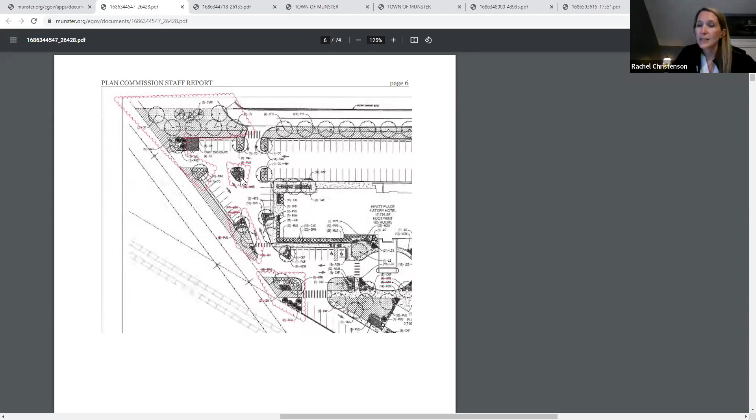Jill, if you'd like to tag team with me on this from an engineering perspective, that would be helpful. But from my planning perspective, I think for site circulation a landscape island is typically helpful in parking lots. I had bigger issues with a striped parking area being at the landscape island. I feel better about it being removed than having the parking spaces outlined there, though I don't love it being completely removed. For site circulation I think it would be challenging for those parking spots. However, from an engineering perspective, I'd like to hear what Jill has to say.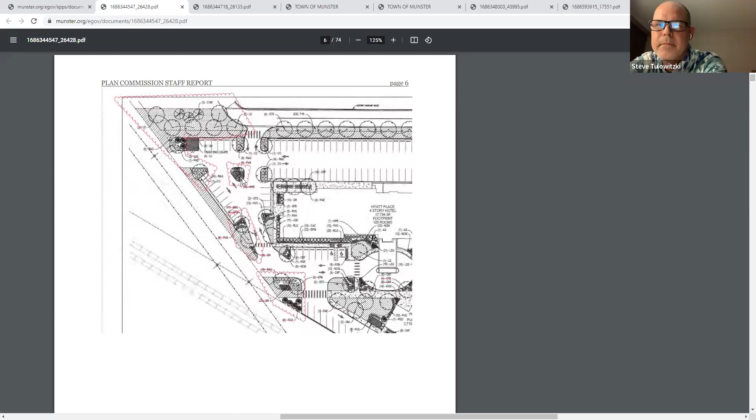It would definitely function better for drainage without the curb, but I agree it helps channel traffic if there's a curbed area instead of a big wide expanse of asphalt. And what we're looking at on the screen now isn't what's actually there, because those parking spots will be pushed back further, so there's actually room to put an even larger landscape island, which might make plowing a little bit easier. I like the idea because I think it's an area where we could do a green infrastructure project personally, but it would be okay with me if it were removed and not striped as parking as well.

And Josie, can you show it where the bike path is removed, instead of... Yep.

So the guy talking about— No, I don't know, where's my lawyer? Because how does this work? It's on discussion, it's back to us. Back to us? Yeah. All right, unfortunately Jay can't speak right now. So mechanically, if Mr. Tulowitzki wanted to amend his motion, he could amend his motion and seek a second, or you could call for a vote and have it go either way.

Is your second still good, Mr. Raffin? With the island coming out—but he didn't take the island out, so my second is not good. Okay, and if we're talking about discussion—discussion—yeah, I replaced, I thought, a bunch of curbs like this at Strack & Van Til in Hammond.

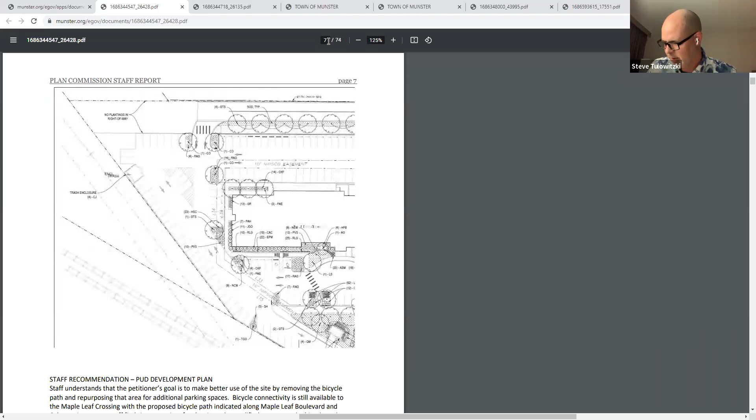So, procedure-wise, we have a motion without a second after the clarification. Based on this discussion, I would like to amend my motion to also remove the requirement for the landscaping and have it be a drain instead, which will make it like Strack & Van Til. Don't put that piece in the motion, but you can remove that third bullet point sub-bullet as well.

I will second that motion. There's a motion and a second. Any more discussion? You hear the motion?

We'll send you a copy of it tomorrow. So it's taken out the two, taking out the three parking spaces on the triangle. Thank you. Even the catch basin, as it is, no curbing.

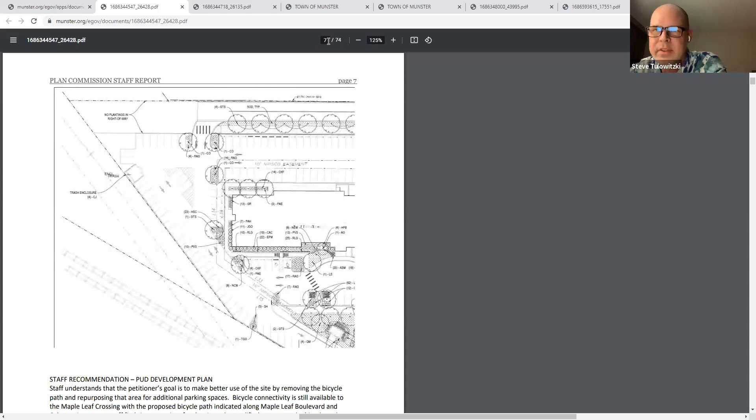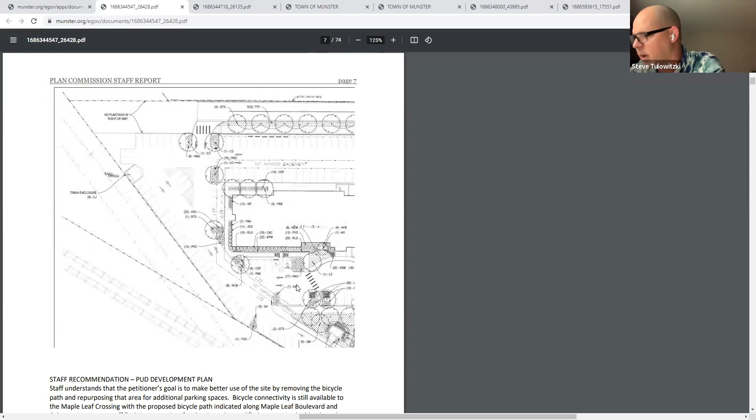So the motion, if I explain what I think I'm making, let me know if it's wrong. As the staff report says, the first dash remains, the second dash remains, but it has only one sub-bullet, which is the first one: the landscaping in the far northwest corner of the site. Then it has the third dash with the crosswalk to be adjusted. And then the final two dashes are removed, and there's some language around coordinating with the site plan or matching the site plan review process. Is that correct?

That's correct. There's a motion and a second. Any further discussion? Can I just get a clarification?

The three parking spots are out, no island, just paved, and the two islands that were supposed to be landscaped now go back to parking spots, correct? Correct, Lot 7. Confirm the square footage, box is a box, and the crosswalk is as is - perpendicular to Calumet. And then landscape that one northwest corner, yes. I think there's also language for when Maple Leaf Boulevard is built, to landscape that trapezoid.

You texted me. But Councilman, are you done with the motion? I am. Okay, you got it, Mr. Anderson. I got it, Mr. Baker. Is there a second? There is. We have discussion, we have clarification.

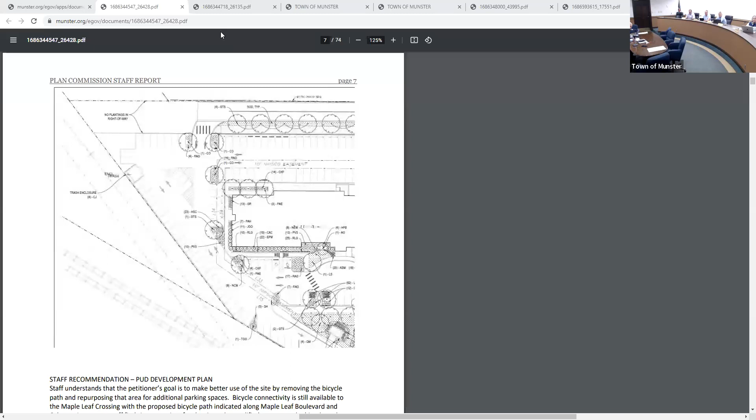Approved. Next up, let's keep talking about this at PC 23-011. J. Lee's Maple Leaf Crossing LLC and HPE Munster LLC are requesting approval of a subdivision and replat of the Maple Leaf Crossing PUD to modify lots 2, 3, 4, 5, 6, 7, and outlots A and B.

Ms. Rachel. Hi, a little quicker. We have worked with the petitioner on this one and had some modifications from the original submission, and the petitioner has worked with us and we've got it to a place where staff is happy with where the lot lines are falling.

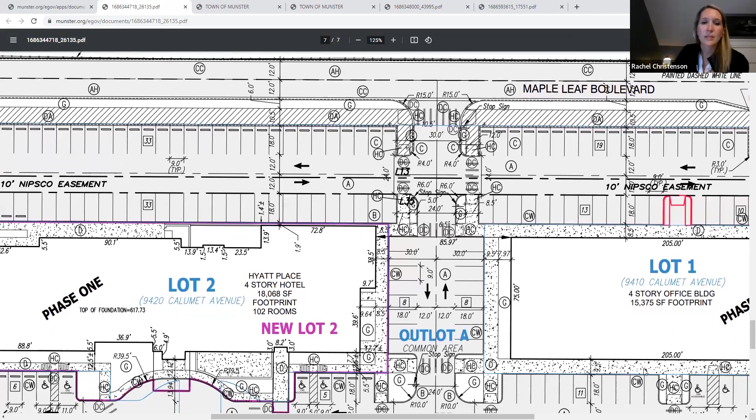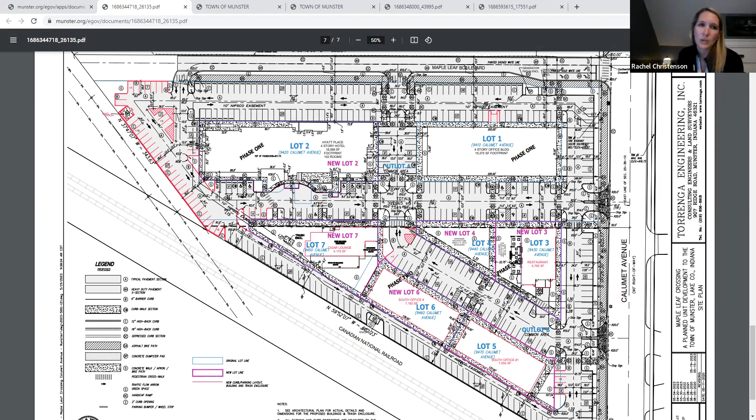From my staff perspective, I would recommend a motion that is just contingent on the previous approval, the conditions that were made with that one. If you look at the lot on this one, Jill, could you maybe zoom out a little bit? So what we worked out between lot 7 and lot 6, there was a funky parcel line that we've squared up a little bit so that if someone's coming back to replace sidewalk, it makes some sense - instead of it coming together at a 90-degree angle rather than a triangle piece within the concrete area.

The other amendment we asked him to make was down by lot 5. There was a property line that cut through the middle of those four parking spaces. He's moved that lot line so that all of the asphalt is in outlot B and not also in lot 5. So as staff, I'm comfortable with this one moving forward. We did have a join-in petitioner because lot 2 is actually owned by a different property owner at this time, but that was the Hyatt, and they submitted an email that said they were joining the petition along with Jay. So, unless there's any questions from me.

Okay, is there any questions for Rachel on her presentation on this? Anything to add, Mr. Anderson? Absolutely. Ms. Jill?

Petitioner, would you like to speak on this particular issue? No? All right, it's a public hearing, we'll open it up to the public. Everybody just relax.

Going once. Going twice. Closing the public hearing. Mad rush. Bring it back to the board.

Mr. Chairman, I'll make a motion to approve PC docket number 23-011, replat of the Maple Leaf Crossing planned unit development that modifies lots 2 to 7 and outlots A and B as shown on the Maple Leaf Crossing site plan prepared by Torrenga Engineering dated 5/19/23. This approval is conditioned upon the planning commission's approval of PC docket 23-010 and any condition as part of that approval. Second. Motion and a second, any discussion?

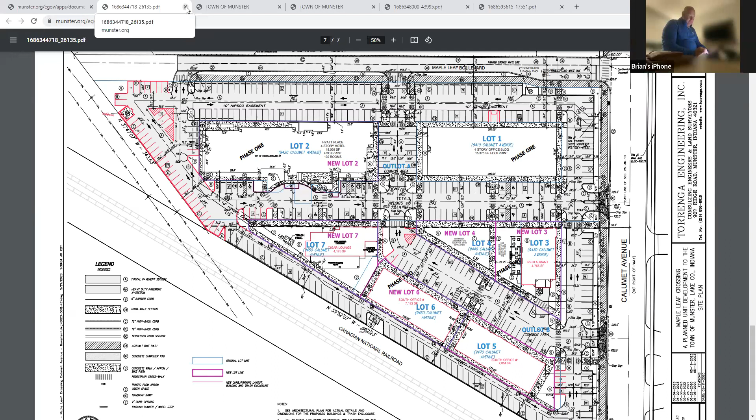Be there none, Mr. Anderson? Mr. Tulowitzki, yes. Mr. Speck, yes. Ms. Mellon, yes. Mr. Rappin, yes. Dr. Kulturitis. Mr. Baker, yes.

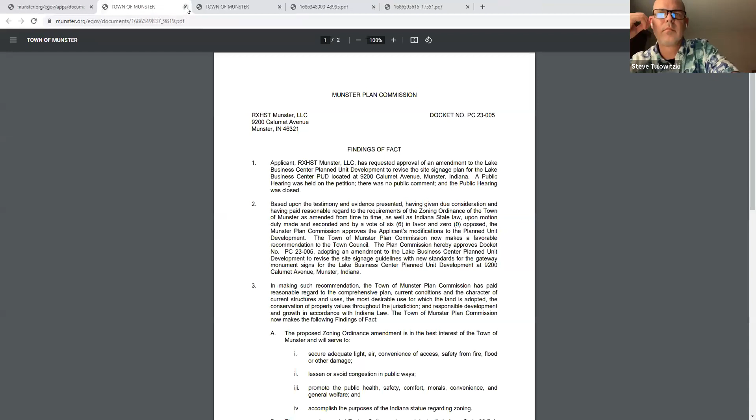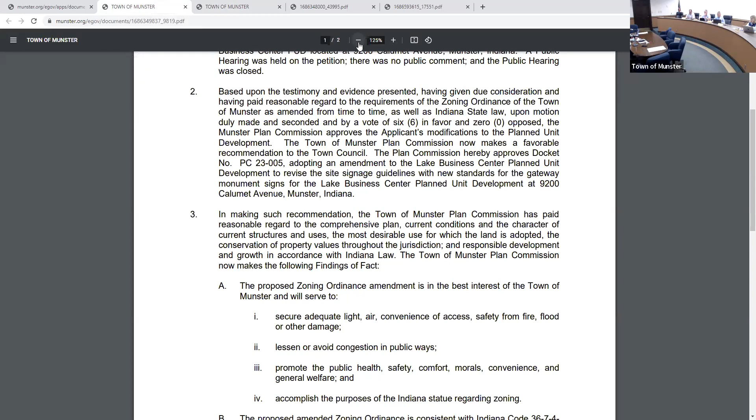Mr. Chairman, if we do this as a group. Absolutely. Mr. Rappin, since you have that excellent suggestion, Mr. Chairman, I'll make a motion to approve PC 23-005 and PC 23-008 findings of fact. There's a motion and a second. Any discussion? Staff, anything to point out?

This has all been approved. We're good from my perspective. There's a motion and a second.

Mr. Anderson? Mr. Tulowitzki, yes. Mr. Speck, yes. Ms. Mellon, yes. Dr. Kulturitis, yes. Mr. Rappin, yes. Mr. Baker, yes. Moving right along, other business, additional items: 23-009, Brian and Patrice Kamstra are requesting approval of a final plat for Kamstra's addition, a minor subdivision consolidating two residential lots at 1550 and 1546 Park West Circle.

Ms. Rachel? On this one, we had the plat committee approve the preliminary. The final plat was submitted, and it's dated 3/29/23. It looks good, and my staff recommendation would be to approve as presented.

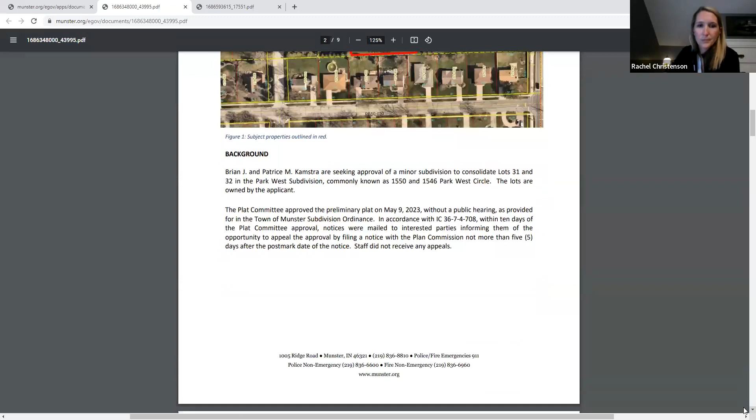Move to approve PC docket number 23-009, granting approval of the final plat for the Kamstra addition. I'll second. Motion and a second to make two lots into one lot for a big house. Any other discussion?

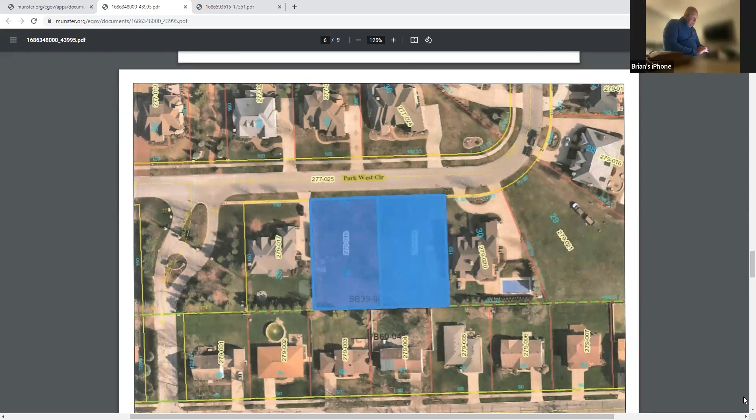Mr. Anderson? Mr. Tulowitzki, yes. Mr. Speck, yes. Ms. Mellon, yes. Mr. Rappin, yes. Dr. Kulturitis, yes. Mr. Baker, yes. Moving right along, request for clarification of the Lake Business Center ordinance number 1602.

Way to slip that one in. No, this is not a long conversation. Meatheads went out of business, and if you look at ordinance 1602, it specifically calls out the structure that Meatheads and Noodles and Company are in as 'Meatheads and Noodles and Company.' It's staff's belief that this is merely to identify the structure rather than to say the town ordained and made it a condition of the PUD that there shall be a Meatheads, but we do not want to take that administrative liberty.

So we are looking for an indication from the planning commission that this is an identifying adjective. I have one question before we approve this: is this a multi-tenant building, correct? So there are two tenants, one's Meatheads and the other is Noodles. Does the other side have Noodles listed as well? And if we're cleaning it up, we should clean all of it up, right?

All we're looking for is an indication, a voice vote saying this is an identifier. We're not amending the ordinance, we're not amending the PUD. We're looking for your concurrence with staff's interpretation.

And that comes to us, why? Because you went to the planning commission. Because indeed, it's an ordinance thing, right? If there was indeed a belief on the planning commission that you really wanted Meatheads and Noodles.